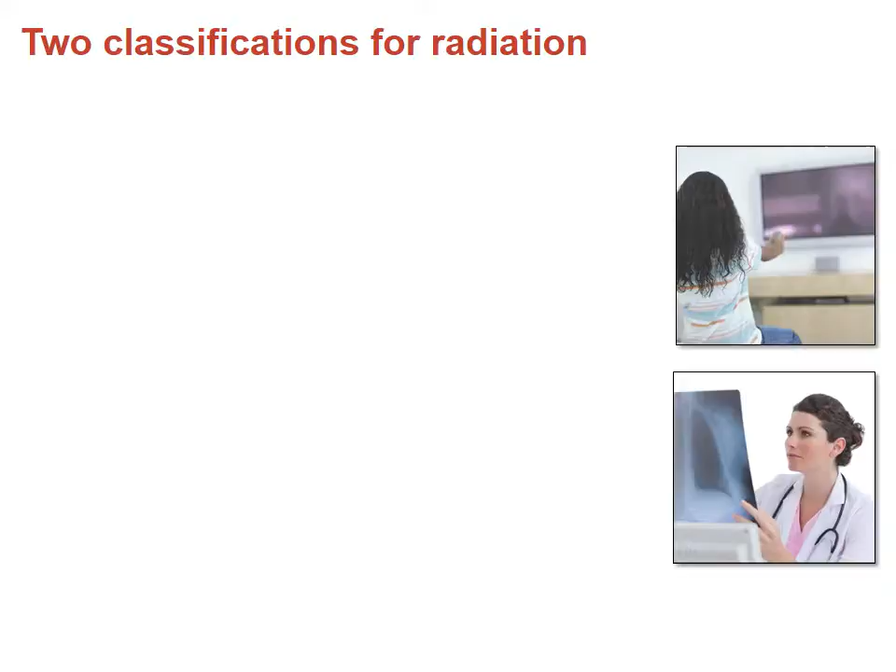Following up on that, we also introduced the idea of 2 different types of radiation. At the very beginning of this class, I think we're comfortable with the idea that not all radiation is bad. You emit radiation, I emit radiation. Everything that has a temperature, so that would be everything that exists in the universe, emits some kind of radiation. The stuff that is not bad, we're calling non-ionizing radiation, and the stuff that is potentially bad is the ionizing radiation.

So we use it for medical x-rays. It's also what is emitted when nuclear reactions are going on. So what we use as the dividing line between these two different types of radiation is whether or not a single photon, or a single little bit of ionizing radiation, carries enough energy to strip an electron from a molecule. If it can do that, then it can damage you.

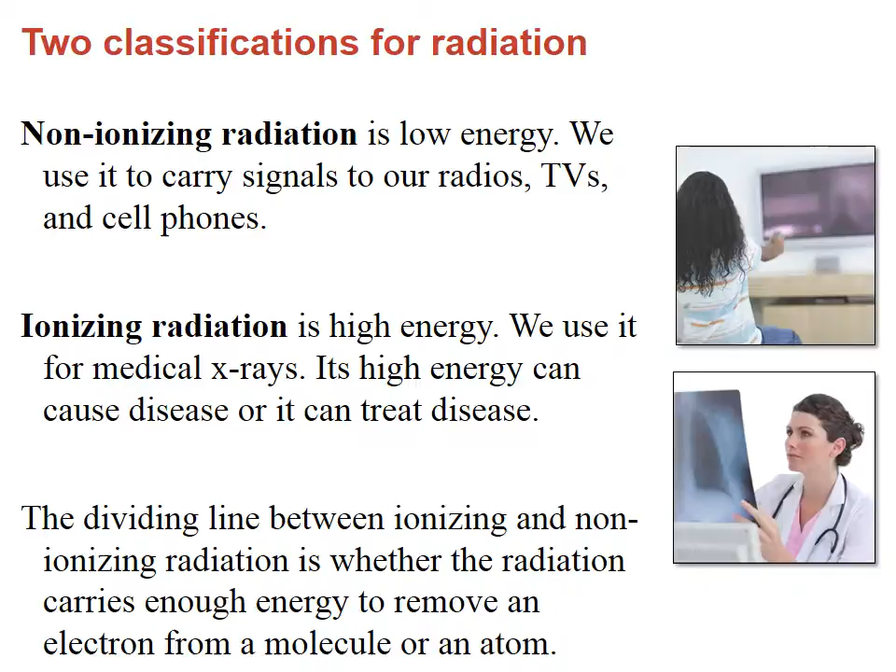Atoms are made up of protons, neutrons, and electrons. Inside their nucleus, they have protons and neutrons. Isotopes come into play because isotopes are atoms of elements that have the same number of protons, but they can have different numbers of neutrons. Depending on how many neutrons they have, they can be a stable atom or an unstable atom.

In the case of unstable atoms, they're going to want to make themselves more stable by releasing some radiation. When that happens, that is ionizing radiation. And when all of these things happen together, we call that a radioactive element.

So last time we tested a bunch of different radioactive materials, and I mentioned that most of your smoke detectors contain a radioactive element.

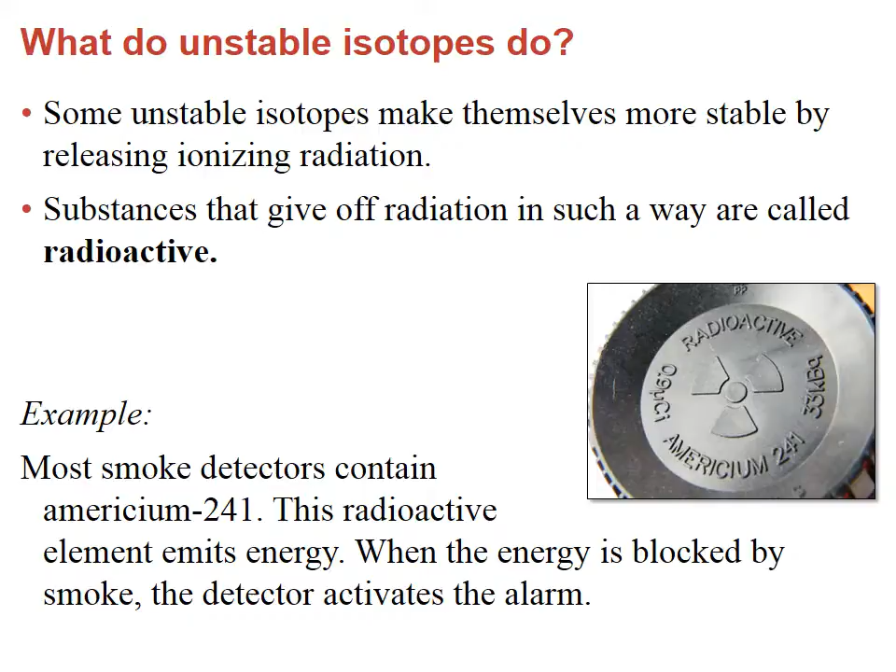We shouldn't be super concerned about the possibility of getting exposed to little bits of radiation because we are exposed to radiation every day, whether you like it or not. On average, you are exposed to 6.2 millisieverts of radiation every year. We did a little online calculator last time where you calculated your individual dose, which varies considerably because you may or may not have had a lot of medical procedures last year. My radiation dose is heavily focused on the fact that I do a lot of cross-country flights, so I get a lot of radiation just being high up in the atmosphere on airplanes. So we are constantly being exposed to not just the harmless kinds of radiation, but also the harmful kinds of radiation.

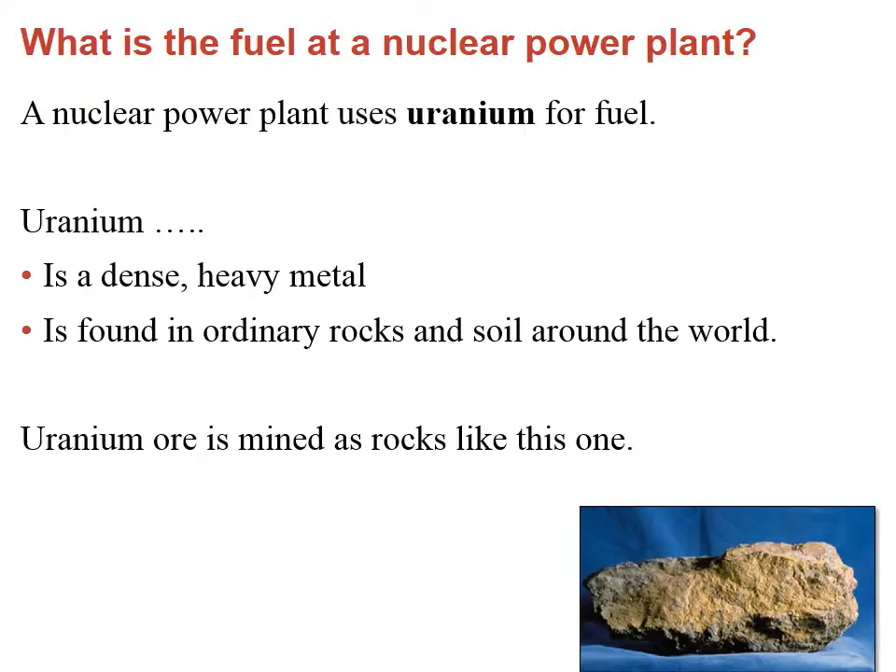So what is the fuel at a nuclear power plant? Nuclear power plants use uranium, and I showed you a rock that is uranium ore. So uranium comes out from a rock like that. In order to turn the rock into something useful, we have to do a process called enriching that uranium.

That is where we take uranium, which naturally has about 1% of uranium-235. That's the type of uranium that we need for nuclear reactors. We have to enrich it all the way up to about 4% uranium-235.

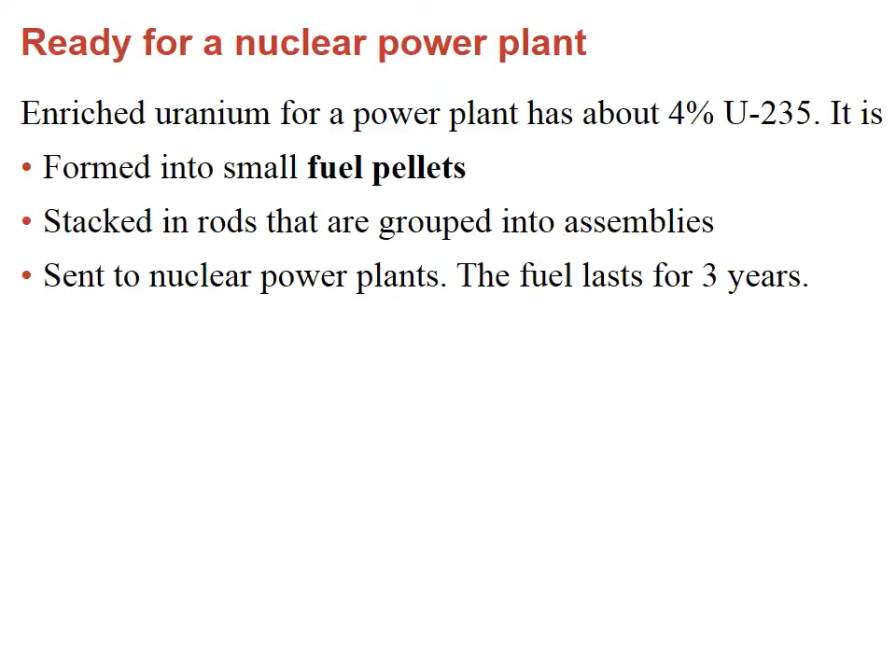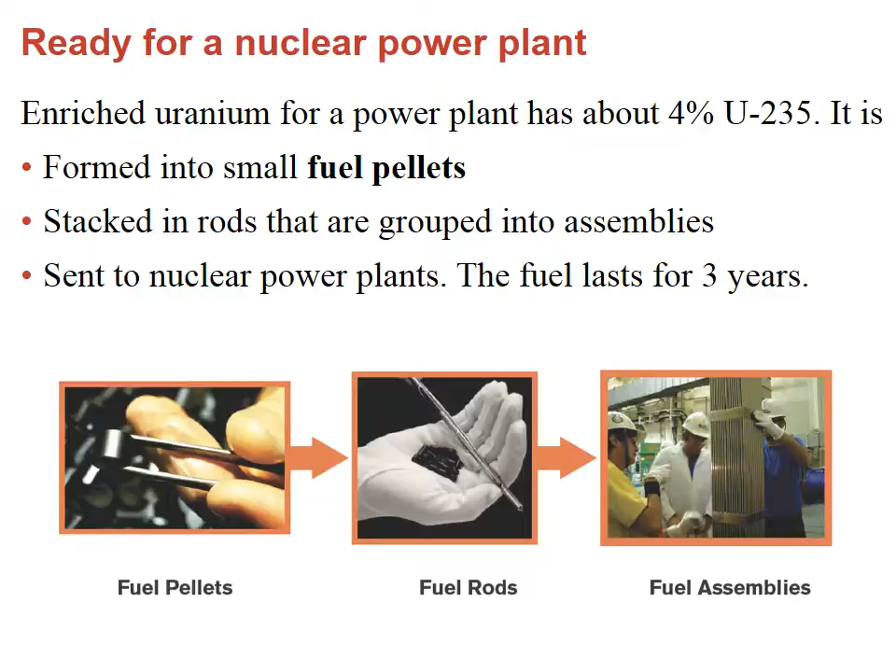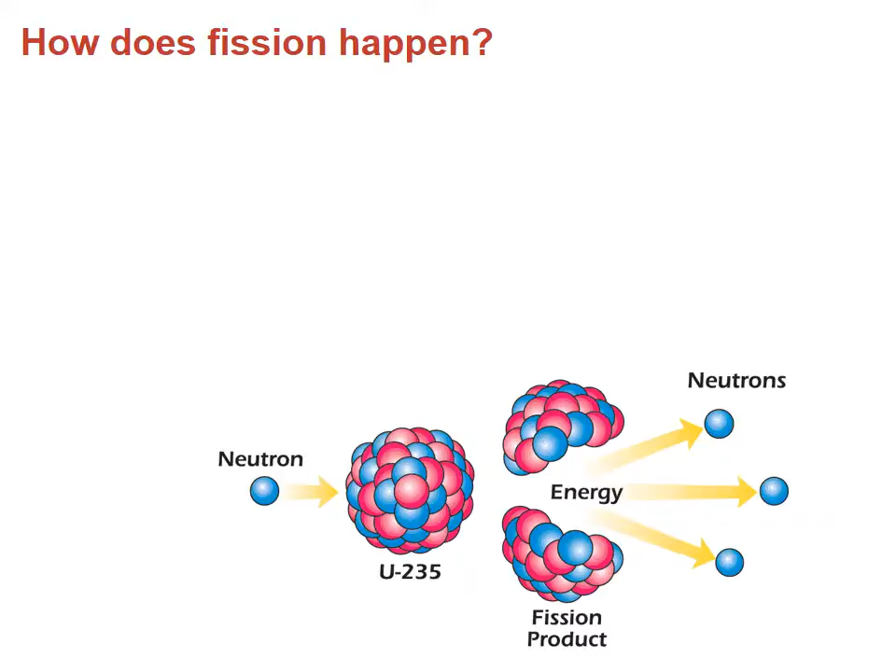So we send those things to the power plant and we pop them in, and something called fission occurs inside the power plant. Fission is the process of neutrons striking unstable uranium-235 atoms. Those unstable uranium-235 atoms split, and that process of splitting releases a lot of energy in the form of heat, and it also releases a few additional neutrons. We call that split fission.

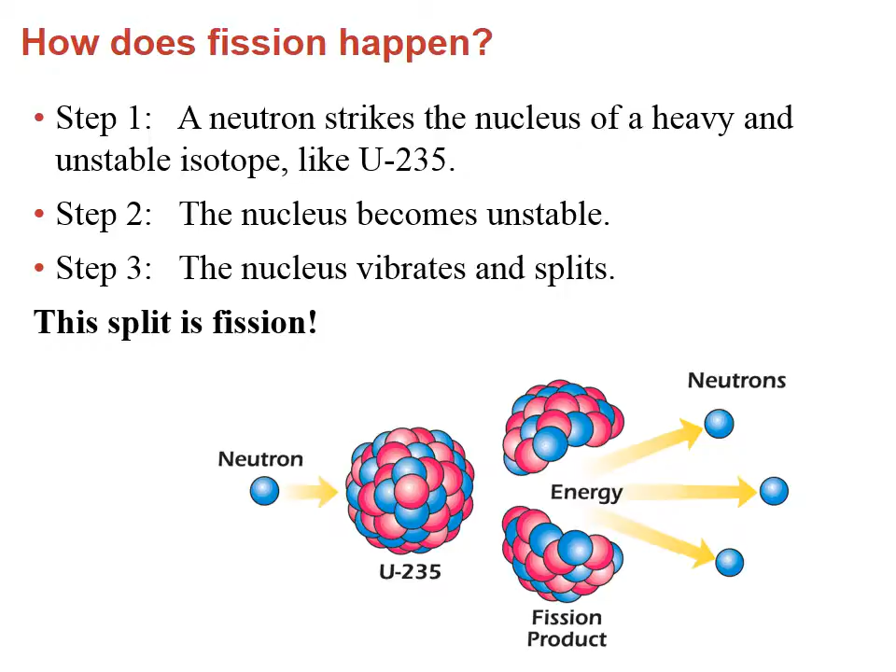I think one very strong appeal of nuclear energy is the amount of waste that is produced. While the waste is definitely radioactive and not waste that you want to have any interaction with, it's not very much of it. One uranium fuel pellet has the energy equivalent of 3 barrels of oil, a ton of coal, 2.3 tons of wood, and 481 cubic meters of natural gas. So we are talking about things that are easy to ship, easy to contain, and things like that.

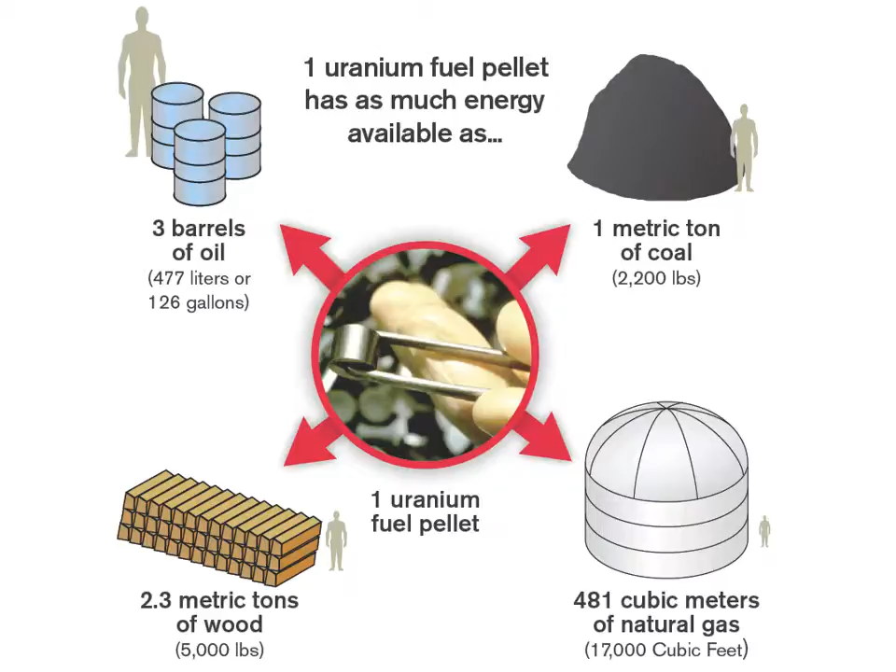Okay, and then we also talked some about how a nuclear power plant works. A nuclear reactor is, in almost all cases, just a water heater, just like every other power plant we've ever had is a water heater. At a coal plant, we burn coal to make heat, and that heat goes on to turn a turbine, etc. The same exact thing is going on at a nuclear power plant, except the way that we produce the heat is through fission and not through burning coal or gas.

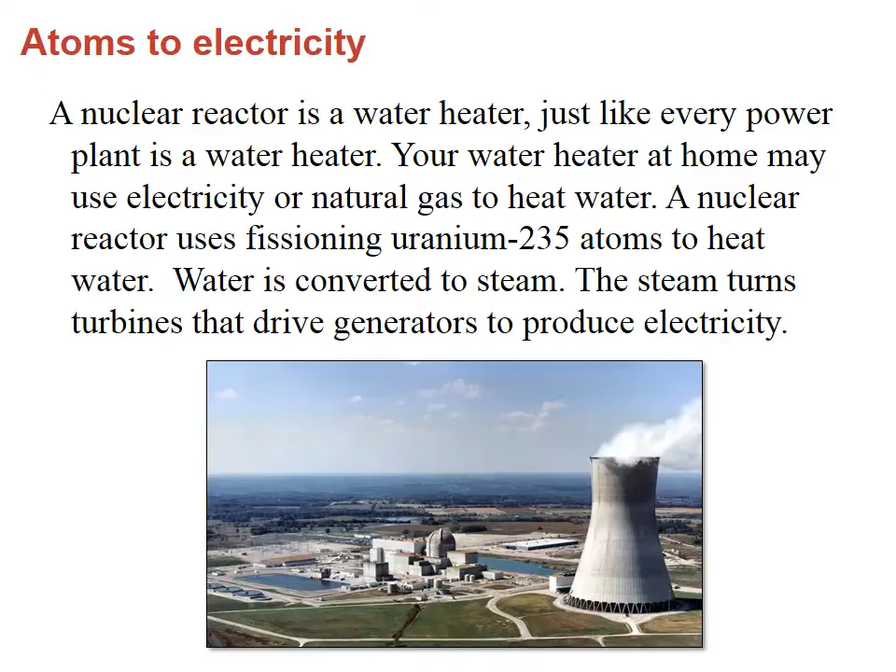This is a photograph of a typical nuclear power plant, and that big chimney is steam coming out of there. So the only thing that is actually emitted from a nuclear power plant is water vapor. In normal operations, nuclear is by far the cleanest way that we get large-scale electricity. This is a diagram of a pressurized water reactor, which is a very common type of reactor that exists.

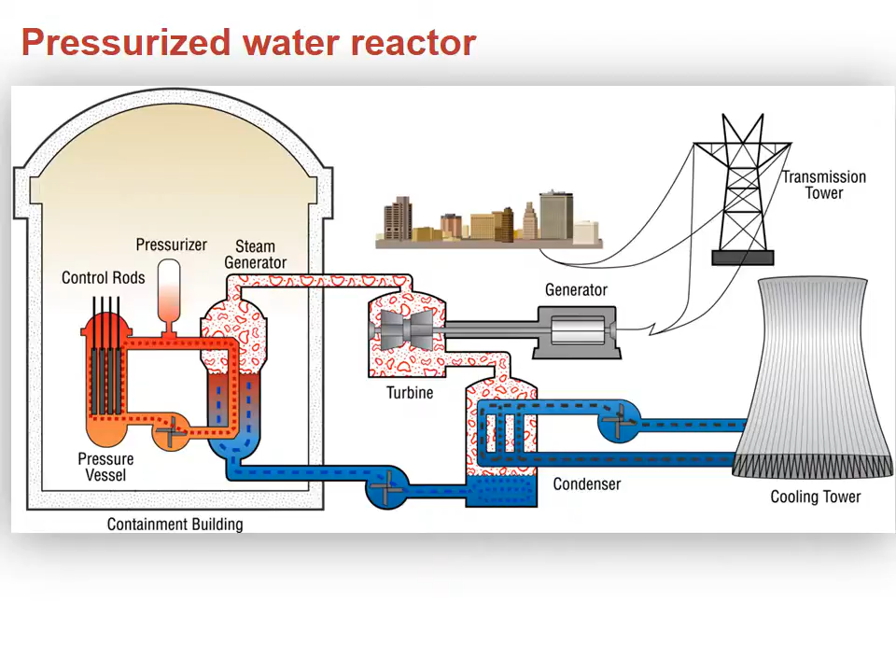Another thing worth pointing out is that all of the fission goes on inside that containment building, a 1+ meter thick, steel reinforced concrete chamber that shields out any radiation from escaping. What is not present here that was present in coal and gas plants is a smokestack, so no emissions other than water vapor come out of this plant.

The lack of emissions does not mean there is no waste produced. Like all industries, power plants produce waste, and a typical plant produces about 30 tons of used fuel per year. That may seem like a big number, but it's tiny compared to what a coal plant produces even in a day. We call that used up fuel, the waste product of a nuclear power plant, spent fuel.

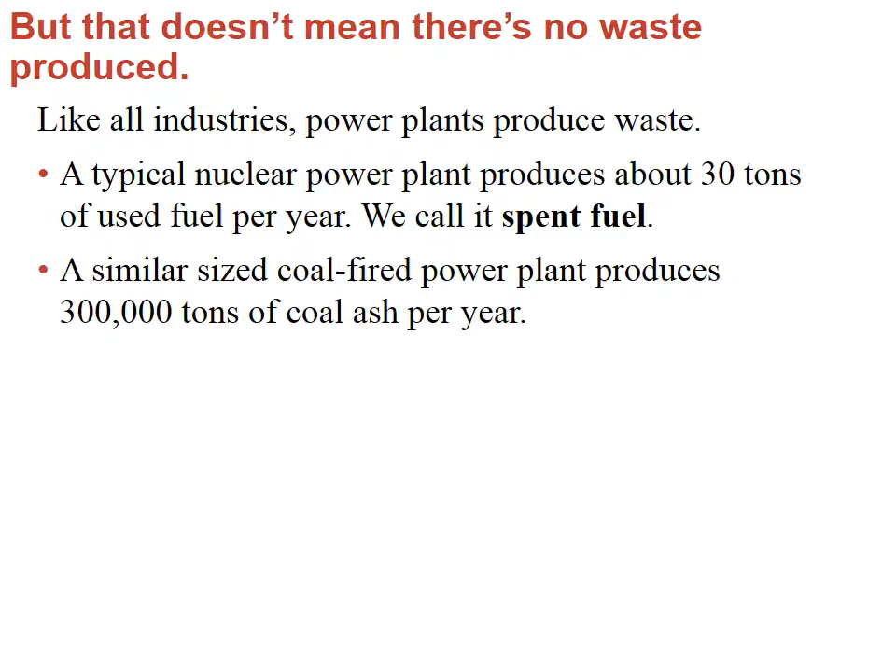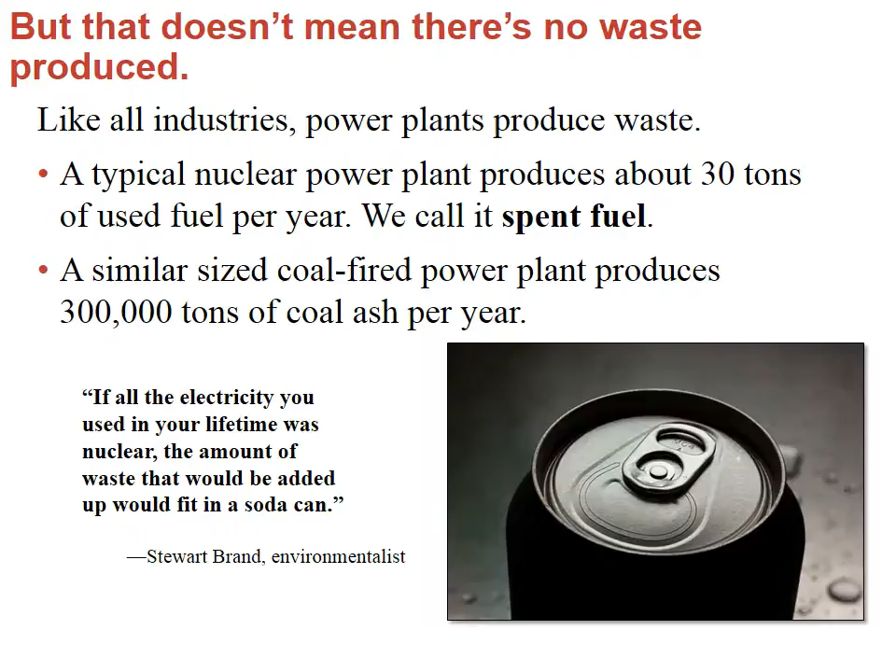So you have about 10,000 times more coal waste produced by a coal plant. A quote I like is that if all the electricity used in your lifetime came from a nuclear reaction, that waste would fit into the size of a soda can. So we are talking about very different scales.

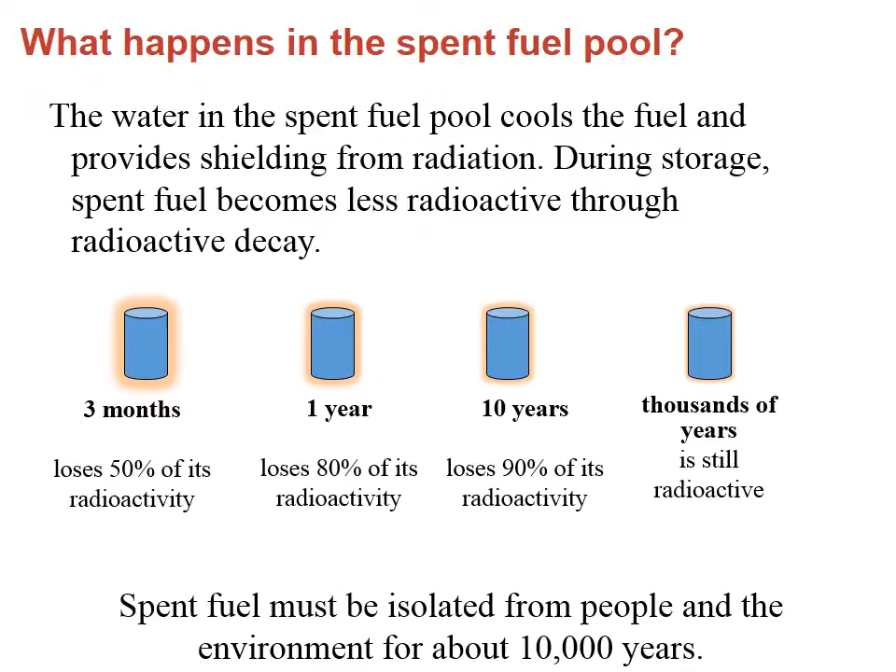There are 2 steps that happen when the waste leaves the power plant. The first step is that fuel assemblies go straight into a pool called the spent fuel pool, and it spends a few years there. Over those few years, up to 80 or 90% of its radioactivity decays away. But spent fuel has to be isolated not just for a few years, but thousands of years, probably about 10,000 years before it's considered totally safe.

So after it goes to the spent fuel pool, we have to take it somewhere, and the next place we put it is in a dry cask. That's pretty much the end of it for us right now. These are steel reinforced concrete bins, and the vast majority of nuclear waste is still stored on site at the nuclear power plant.

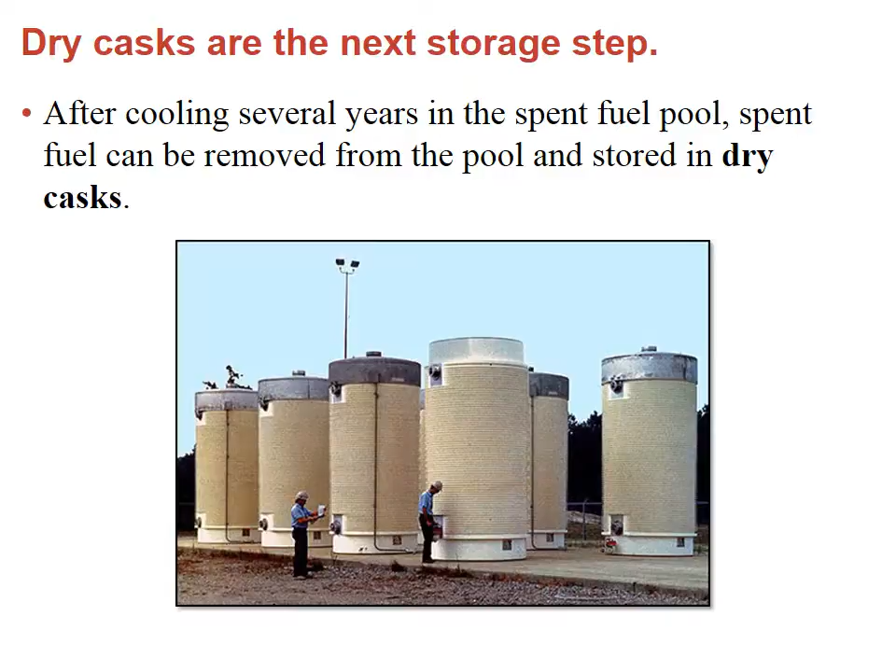In the US, we had planned on storing it underground in a geologic repository. Yucca Mountain, a mountain in Nevada, had originally been the plan for that, but it became politically unpopular and we stopped working on it. So we really don't have any long-term storage option for nuclear waste.

That was a very long review of the things we talked about last week, but it was 2 weeks ago, so I guess it was worth spending some time on.

The last thing we need to talk about is the concerns surrounding nuclear power. The main concern is: is it safe? While the fuel is very small in volume, the waste is very radioactive. You want to make sure that waste doesn't interact with the environment, and that in the case of a meltdown or accident, the waste doesn't end up melting down and exposing people nearby.

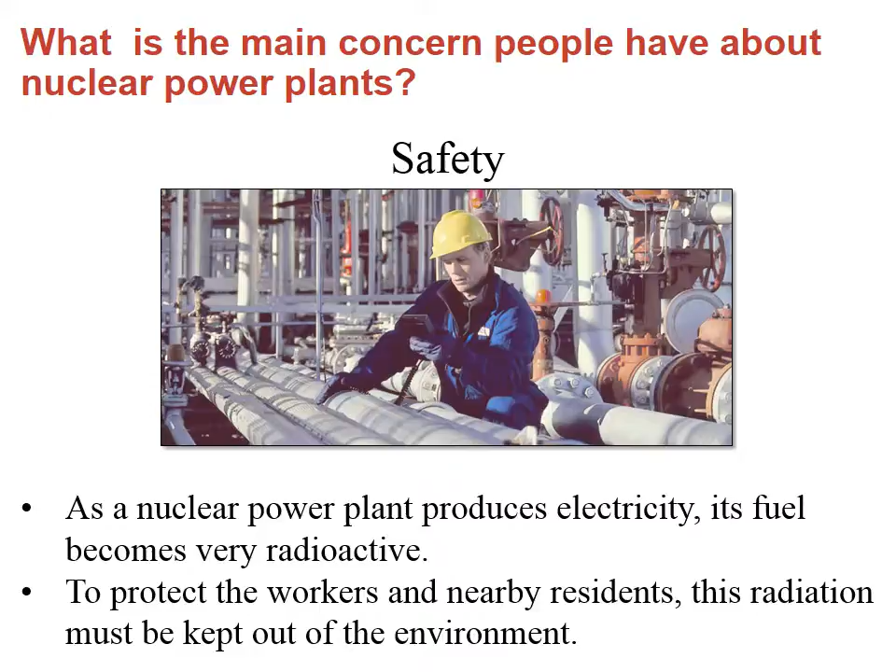There are a lot of things in place to improve nuclear power plant safety. Some features involve using laws of physics and natural properties of materials, like the containment building, that 3 to 4 foot thick steel reinforced concrete chamber where nuclear fission occurs. Another thing is safety systems with many backups, since you don't want a situation where a power outage could cause a nuclear meltdown, so you need backups and backups to those backups.

You also want strong barriers, like the containment building, that will keep radiation inside if all else fails. Another thing is having a really well-trained staff that knows how to behave in emergencies and runs emergency simulations routinely.

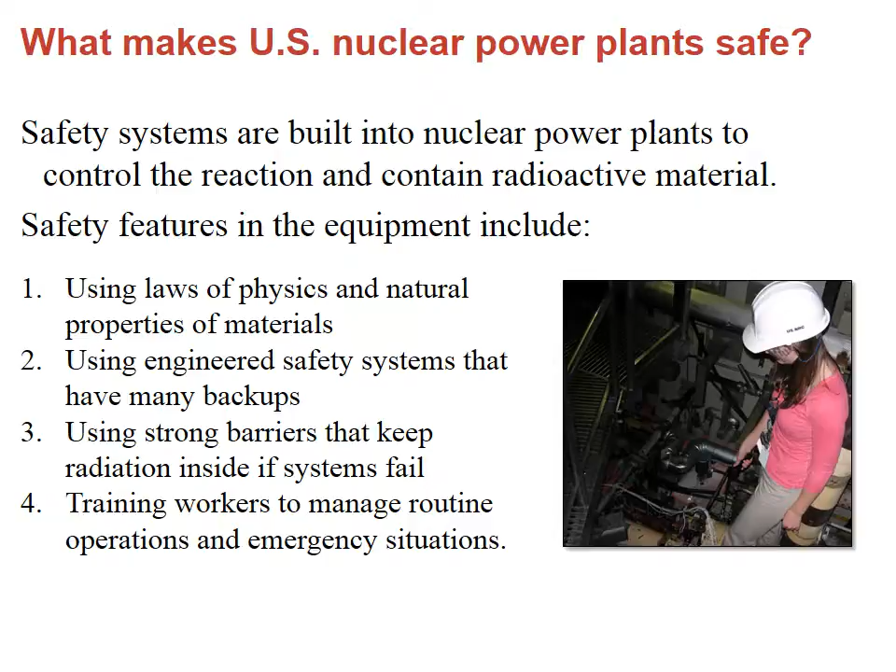To follow up on that first point, it's actually pretty difficult to get a chain reaction going and then to keep it going. All things have to be just right for that to happen, so the fuel, the coolant, and the chain reaction process itself guard against some of these accidents.

I showed you a video last time of people who set up hundreds of mouse traps with ping pong balls on them, visualizing the mouse traps as uranium atoms, each with a single ping pong ball as a neutron. If those mouse traps are hit by a ping pong ball, they snap and shoot another ball into the air. If the mouse traps were too far apart, they wouldn't all snap. That's analogous to the chain reaction: if the fission products, the enriched uranium, are too far apart, the chain reaction won't keep going.

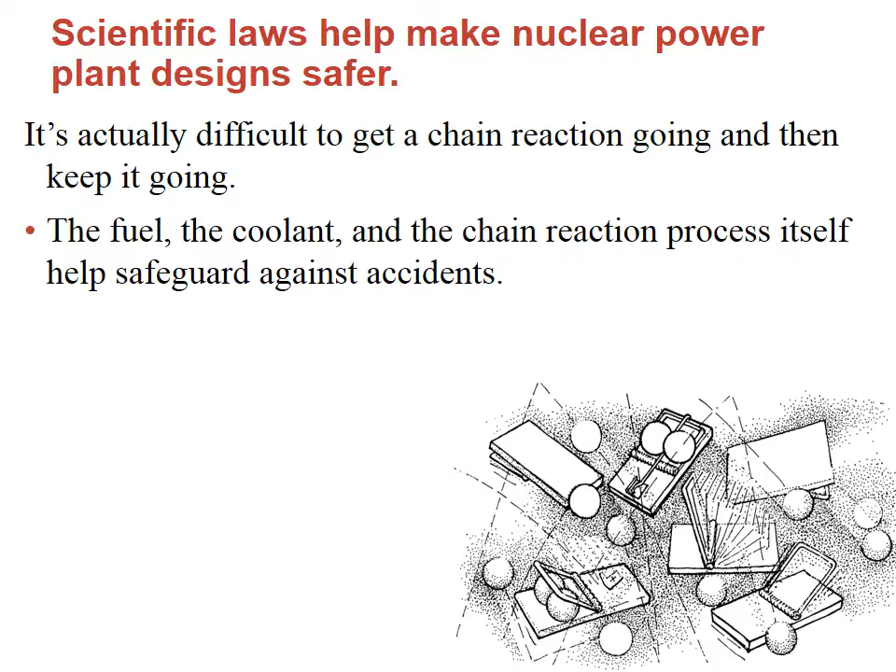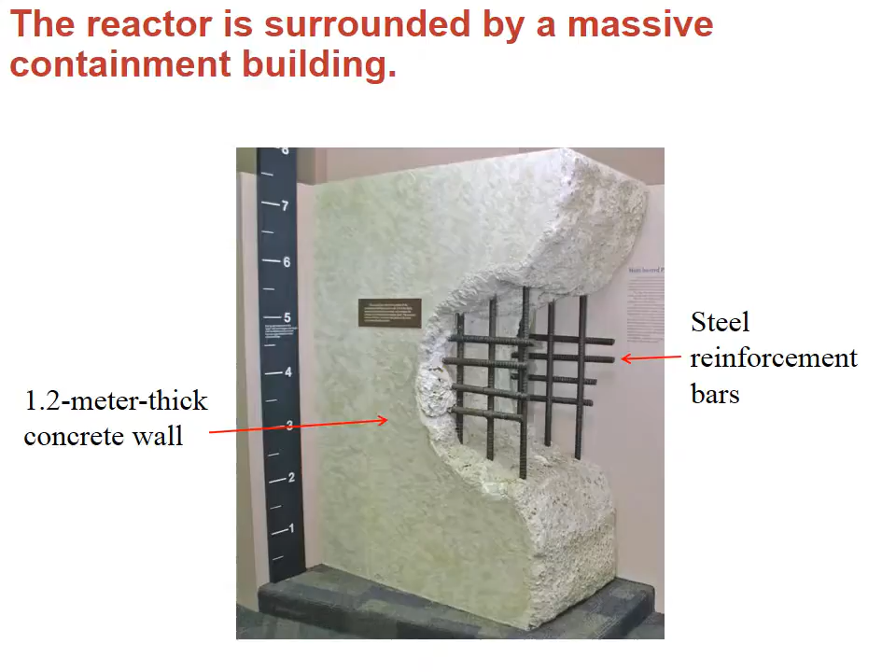They are also designed to address emergencies. So we design power plants to have multiple backup safety systems, and they should be strong enough to survive things like hurricanes, terrorist attacks, earthquakes, tsunamis, etc.

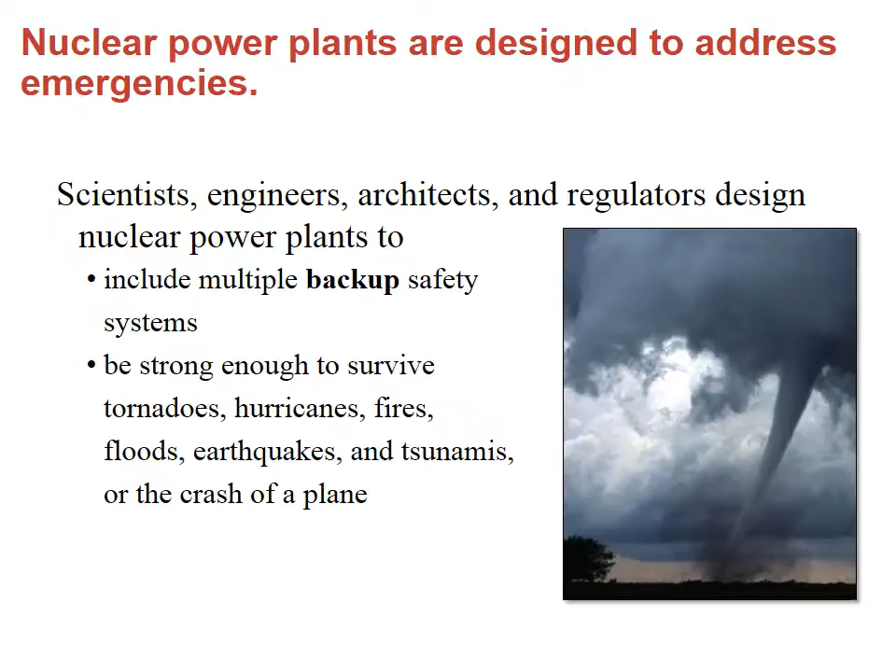The Nuclear Regulatory Commission, the NRC, regularly comes in and investigates safety checks in all the new operating nuclear power plants in the US. So we have multiple backups in place and lots of safety checks and inspections going on to ensure things are operating as smoothly as possible, and anything that could be dangerous is caught long before it becomes a problem.

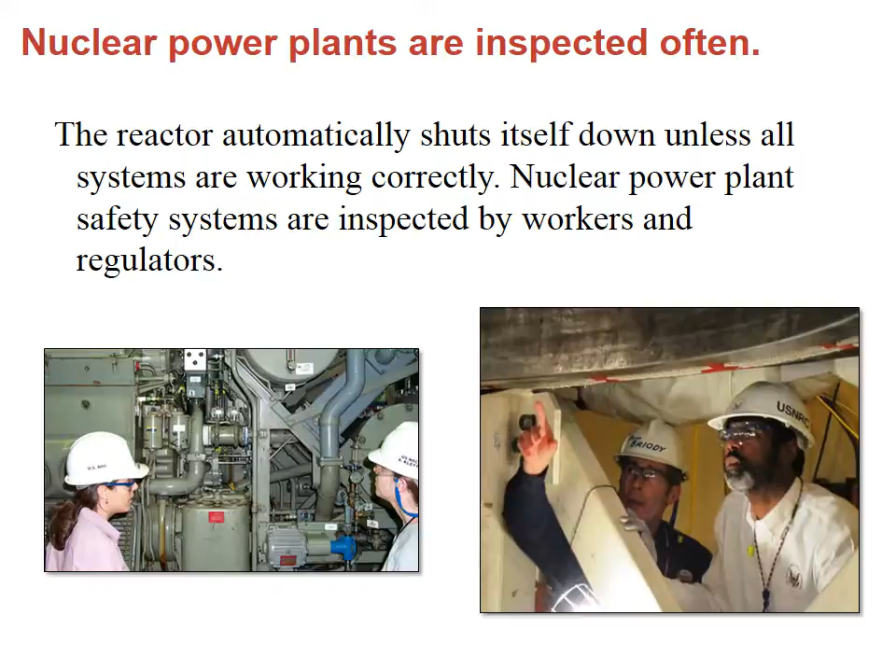The NRC, the Nuclear Regulatory Commission, comes in all the time, and they license and inspect construction of new plants, and they regulate old plants and run safety checks on old plants.

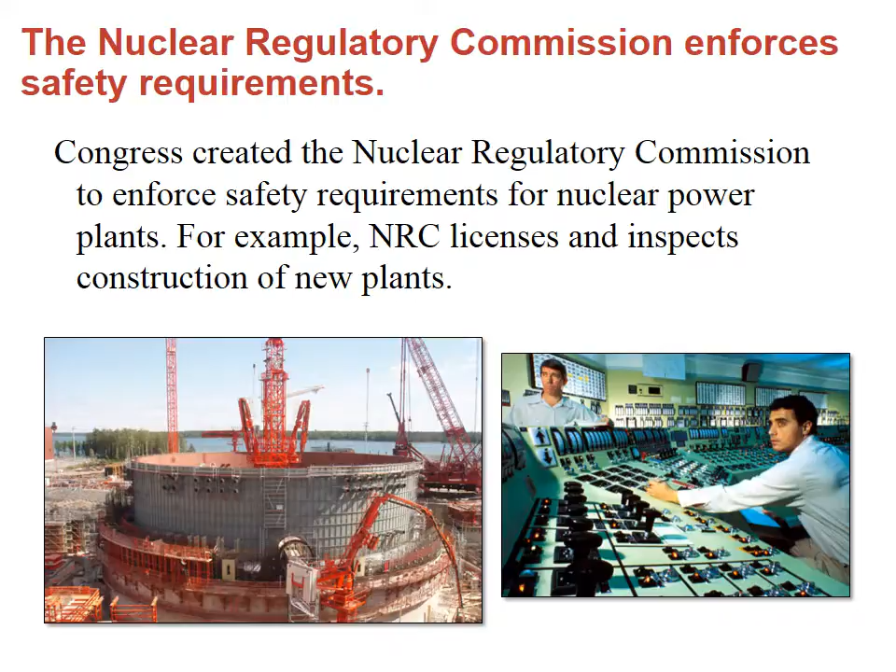I just want to point out that it's not dangerous living near a nuclear power plant. The only reason we're concerned about being near nuclear power plants is because they are dangerous in the event of a meltdown. So your typical exposure is about 620 millirem, MREM, that's 6.2 millisieverts per year.

Living next to a power plant exposes you to 0.5 millirems, basically less than what you're exposed to every year just having a television in your house. So normal operations of a power plant are really nothing to be concerned about. They release virtually no radiation.

That's actually quite a bit less radiation than is emitted during normal operations of a coal plant. And the emissions they put out have no sulfur, none of those pollutants we were talking about regarding environmental impacts of fossil fuels. All they produce is tiny bits of radiation, so small they're almost not worth measuring, and water vapor.

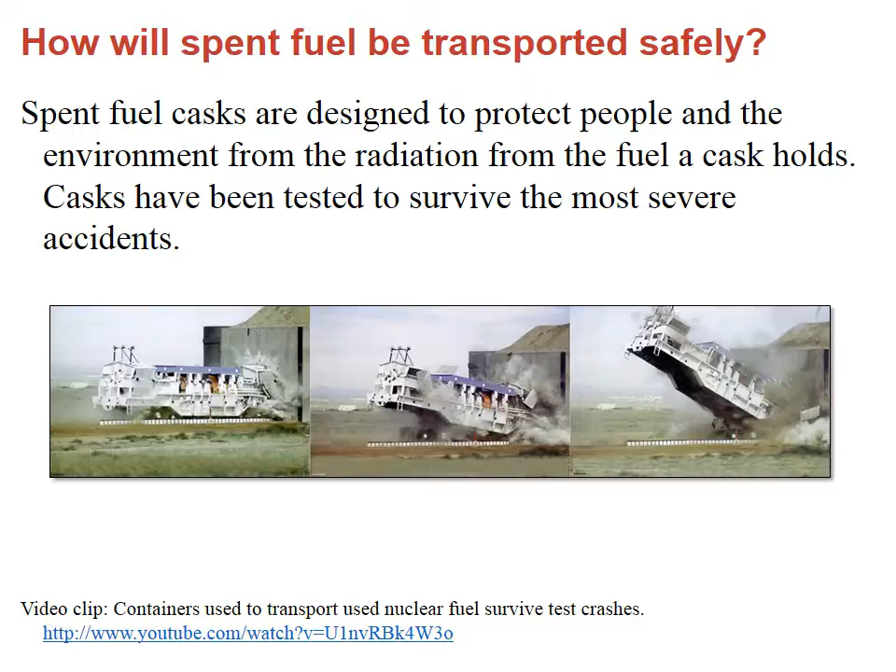We have had 3, I would say, prominent nuclear accidents in the world since we started getting electricity from fission. I'm going to talk about the 3 very briefly and in order.

Three Mile Island happened in Pennsylvania near us. This power plant is actually still in operation. This was in 1979, where coolant was lost - water is used to cool the reactions - so things got very hot, and that released a lot of radiation into the containment building.

But remember, the containment building was this large concrete-surrounded building, so there was virtually no radiation actually emitted to the surrounding areas from this. This was a really hyped up event in the US. It was the first kind of real event that could have happened, and I think it got blown out of proportion probably because of that, but there were no serious injuries or deaths.

The average amount of exposure that a person got was tiny, but it really alerted us to a lot of fears about radiation poisoning. And it was a big setback in that way.

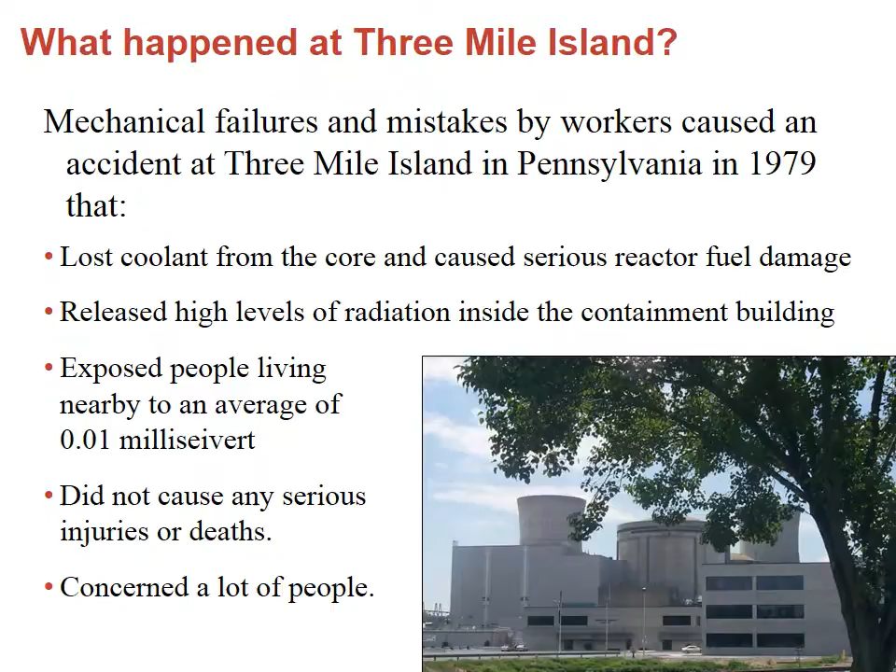In contrast to Three Mile Island, Chernobyl was a real nuclear disaster. This happened about 7 years later in 1986 in Chernobyl, a power plant in Ukraine. It actually happened during a routine safety check - they turned some things off and some things didn't turn back on properly.

As a consequence of this, lots of radiation was emitted. So 28 workers died on site, out of about 600 workers that were there. And there was no containment building at this reactor, so there was nothing to prevent that radiation from being emitted into the surrounding areas.

So a couple of statistics: of those 600 initial workers, 134 had acute radiation sickness from their high doses, and 28 of them eventually ended up dying. And they estimate that about 4,000 cases of thyroid cancer have resulted from this, but really radiation was spread all over Western Europe, Eastern Russia, and of course Ukraine.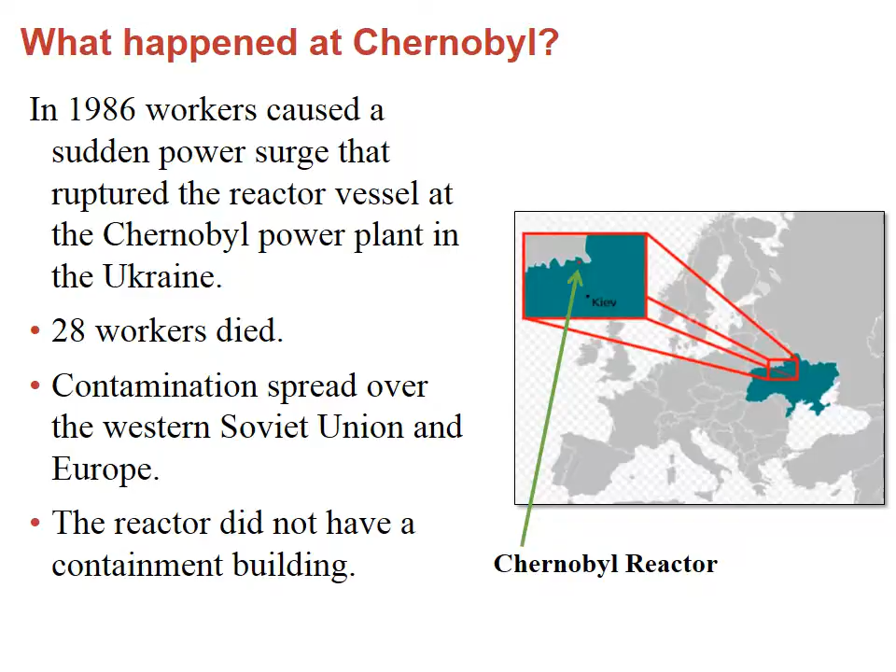Fast forward 25 years, and we really didn't have any nuclear accidents to speak of. There's sort of constantly little radiation leaks that occur, and those are kind of what you hope to find - little leaks that are observed and fixed and dealt with, not really a big deal. So we'd been going for a long time without a real nuclear accident until 2011, when Fukushima occurred.

You're going to watch a whole long video about Fukushima, so I'm just going to hit the main event: there was an earthquake, a magnitude 9.0 earthquake, that occurred right off the coast of Japan. And it initially happened the way that it should have happened.

The earthquake happened and the power plant lost power, but the backup generators came on and inserted those control rods into the nuclear reaction site. Remember, the control rods are these rods that absorb neutrons and prevent the nuclear chain reaction from being able to occur. And everything was going as it should.

But as often does happen with earthquakes over the ocean, there was a tsunami that was triggered. That tsunami washed over the Fukushima power plant, which is right on the coast, and that took out their backup generators. This was a big deal because while the nuclear chain reaction is controlled by those control rods, there is still extremely hot radioactive material inside the containment building.

This was a water reactor that is cooled by water, and it needs to have water constantly cycling through it for a period of a few days in order to cool everything down. Without the backup generators to pump that water over things going on inside the containment building, things got very hot and kind of caused our meltdown.